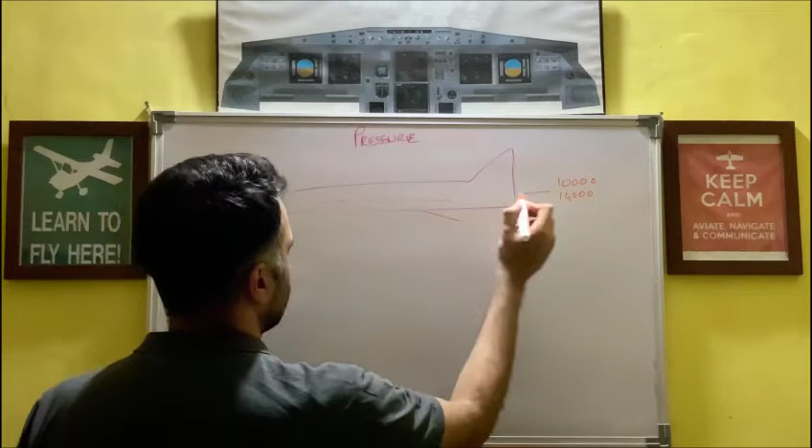So to ensure that at 38,000, 39,000 feet we are able to survive, the air inside the aircraft is pressurized to an altitude of maximum approximately 8,000 feet.

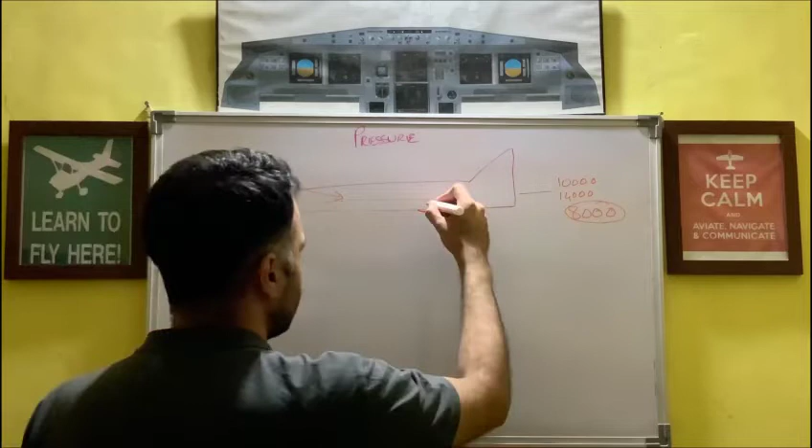How is that done? The pressure inside the aircraft is maintained using an outflow valve. Air comes in from the air conditioning system. The pressurization system doesn't bother about that air, it just controls how much of this air can go out. By closing the outflow valve, you allow less air to go out and you pressurize the aircraft. By opening the outflow valve, you allow more air to go out and you depressurize the aircraft.

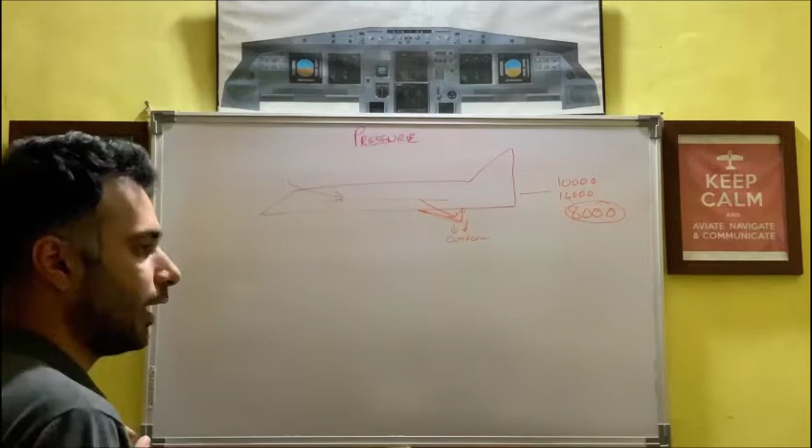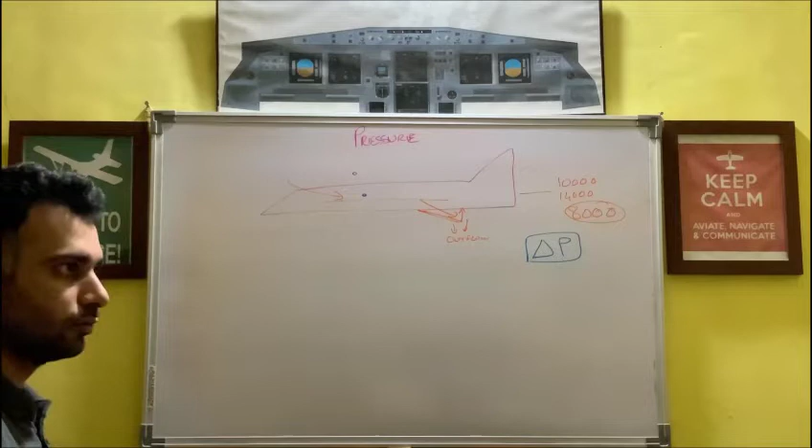How is it decided how much this pressure should be? It's based on a value known as delta P. Delta P is the difference between the pressure inside versus the pressure outside. Since the aircraft, being a structural body, can only handle so much pressure difference, delta P plays an important role.

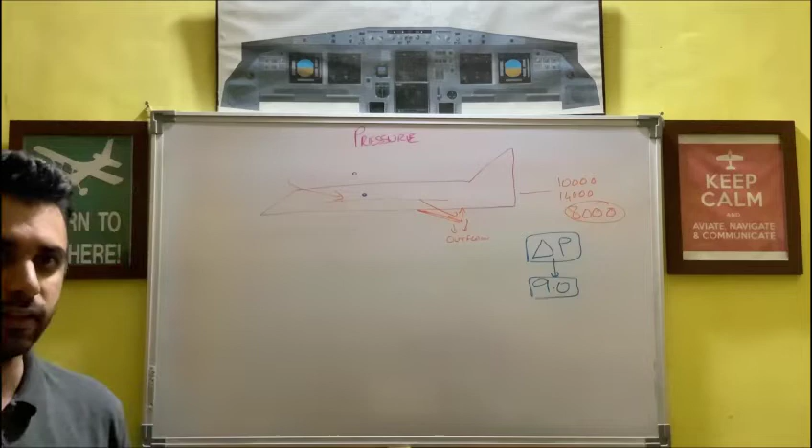Airbus has said that the difference in pressure between inside and outside should not exceed 9 psi. If it goes beyond 9 psi, the structural integrity of the aircraft might be compromised. The aircraft might not be able to handle more than this much pressure difference between inside and outside.

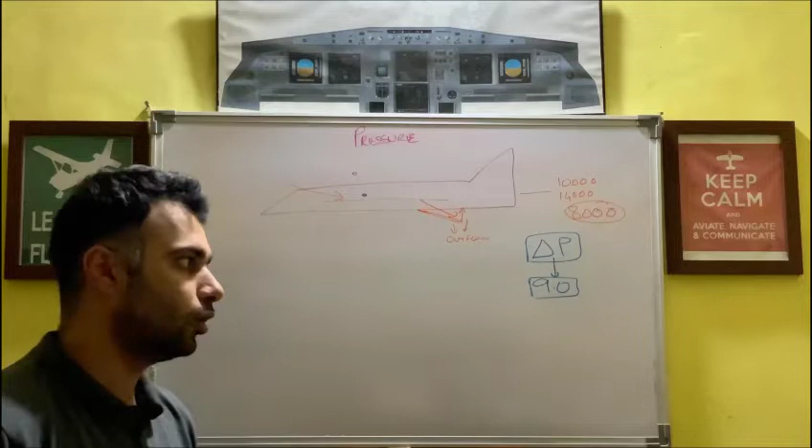So delta P at any given point of time plays an important role in the rate at which the aircraft is pressurized and depressurized. The other important factor is the comfort of the passengers and crew sitting inside. The rate at which this pressure is changed is controlled so that it's a comfortable transition, calculated in terms of cabin altitude rate of climb or cabin altitude rate of descent.

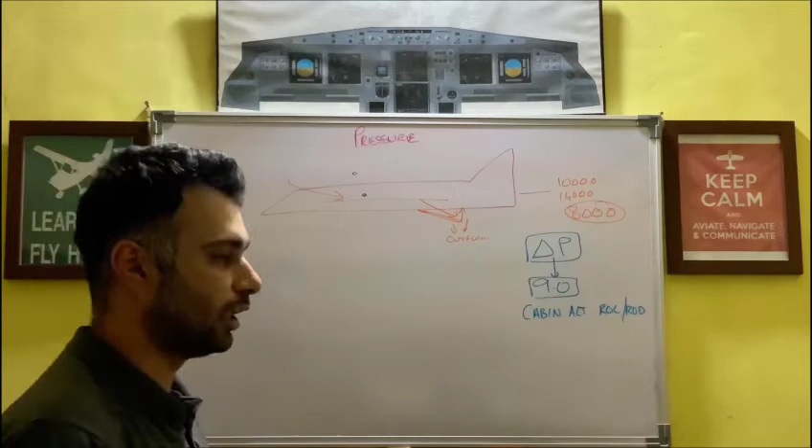Rather than talking about pressure change in terms of PSI, Airbus said let's talk about it as cabin altitude rate of climb and cabin altitude rate of descent. This is so it's more easily and instinctively relatable for pilots, so they understand: if my aircraft is climbing at 3,000 feet per minute and my cabin altitude is climbing at 500 feet per minute, what it means is more instinctively deciphered by pilots and they comprehend it faster.

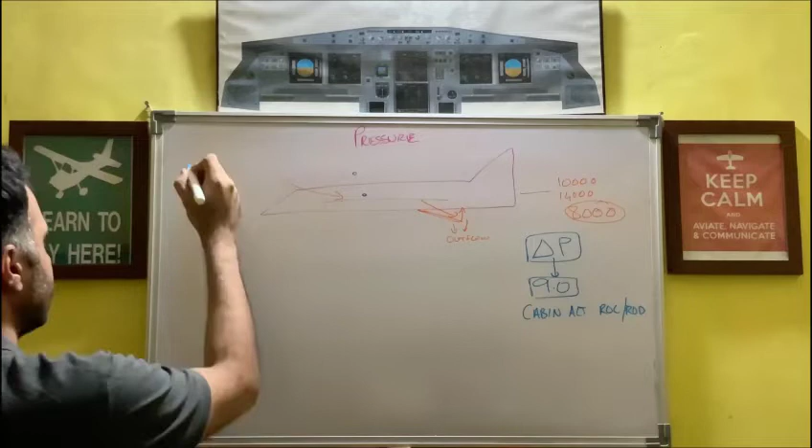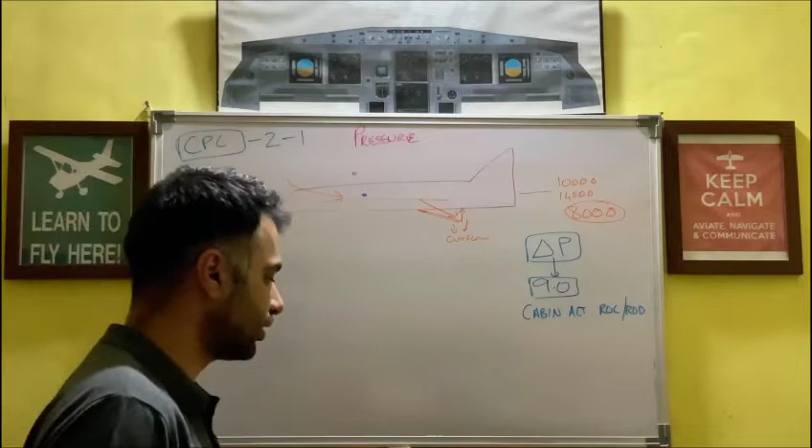All right, so this is how the calculation is done. Now who is doing the calculation is the CPC, cabin pressure controller. There are two cabin pressure controllers at any given point of time. One of them is controlling the system, the other is on standby in case of failure, and they keep alternating each flight.

How do they control this aircraft? It uses the outflow valve and it has a pre-programmed schedule that it uses. So let's understand that schedule. Basically, in different phases of flight, the outflow valve is controlled differently. So what are the different phases of flight?

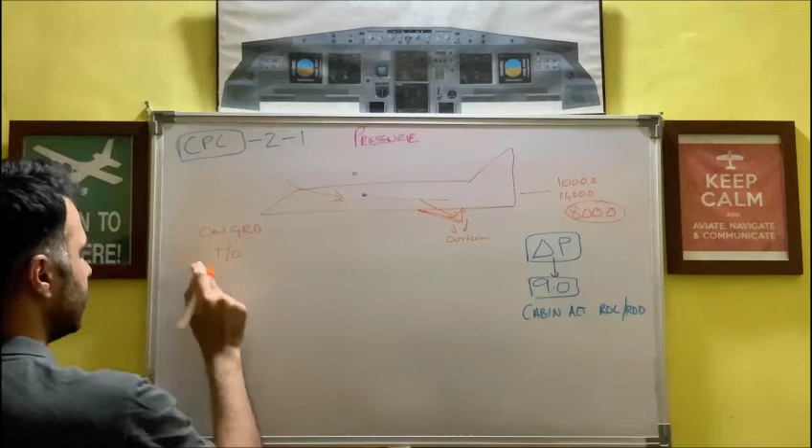There is on ground, then there is at takeoff, before rotation. Then there is climb phase, cruise phase, descent phase, before landing, at landing, and again on ground after landing. There is also an abort phase, which we will discuss after that.

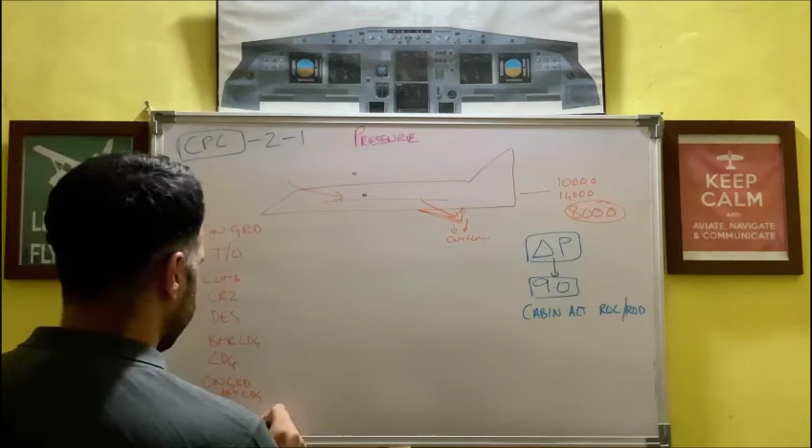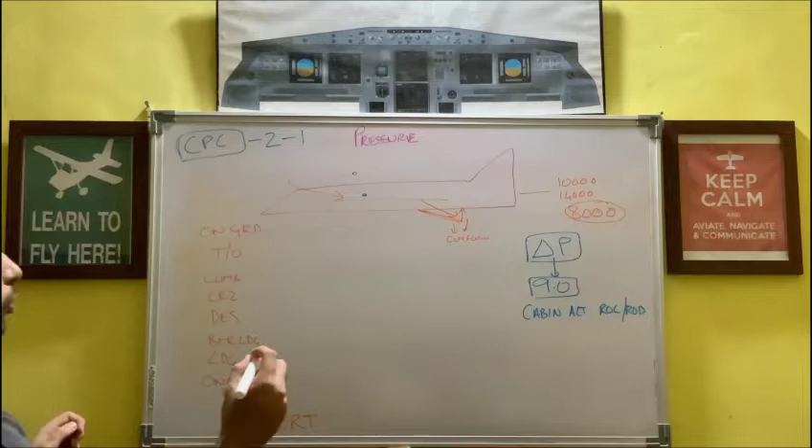So let's discuss one phase at a time. First we'll go through on ground. What happens on ground? Everything is fine, passengers are okay with the pressure, so there's no need for the outflow valve to do anything. So the system says: stay fully open, boss, you have no work to do right now. Then there is at takeoff.

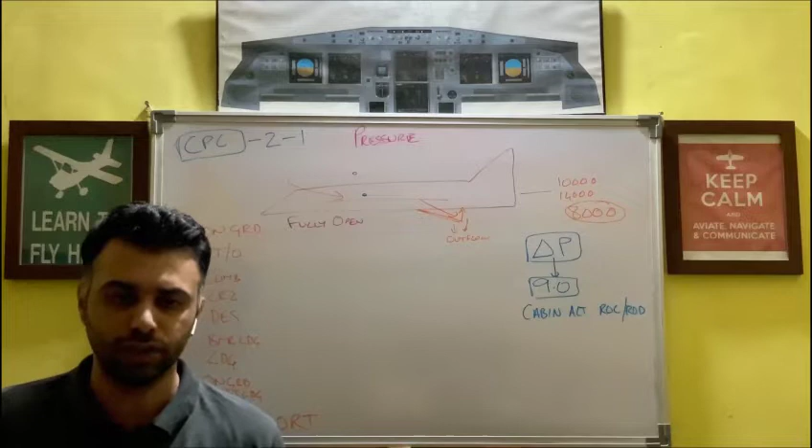When you put takeoff thrust, you are about to start your in-flight phase. So what the system realizes is, if you immediately start pressurizing the aircraft after you take off, it can be discomforting for passengers and crew, because suddenly transitioning from unpressurized to pressurized flight can cause physiological discomfort.

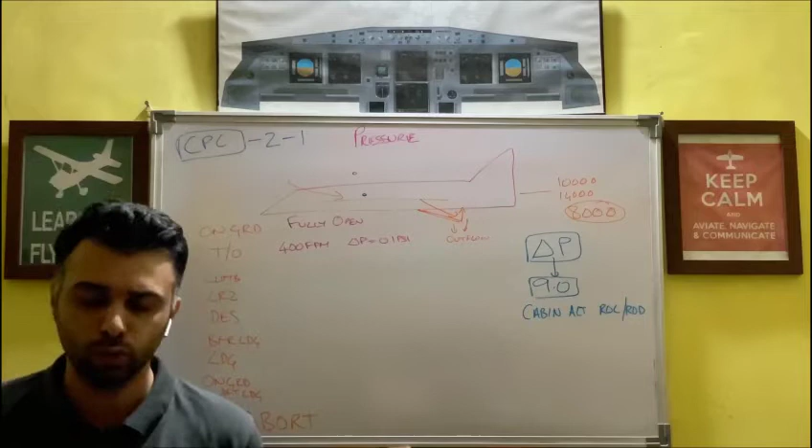So before you actually get airborne, the aircraft starts to pressurize at a rate of 400 feet per minute till the delta P is equal to 0.1 psi. So a little pressurization is done so that the body starts getting used to going from unpressurized to pressurized flight. This is known as pre-pressurization, meaning before the actual need for pressurization, you have already started pressurizing the aircraft. This is for a comfortable transition from unpressurized to pressurized flight.

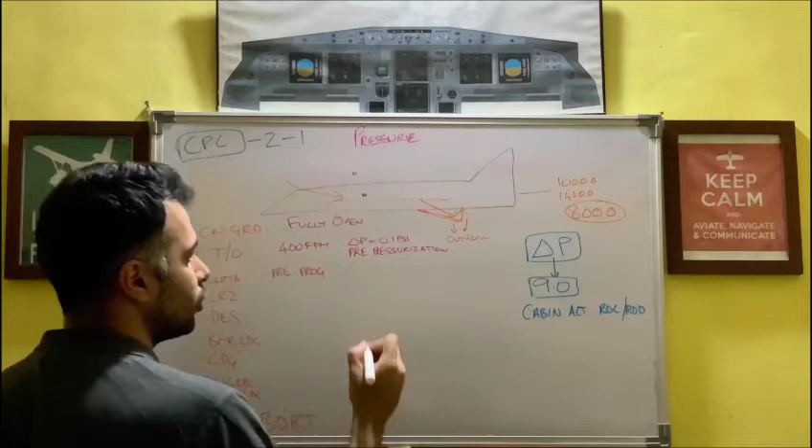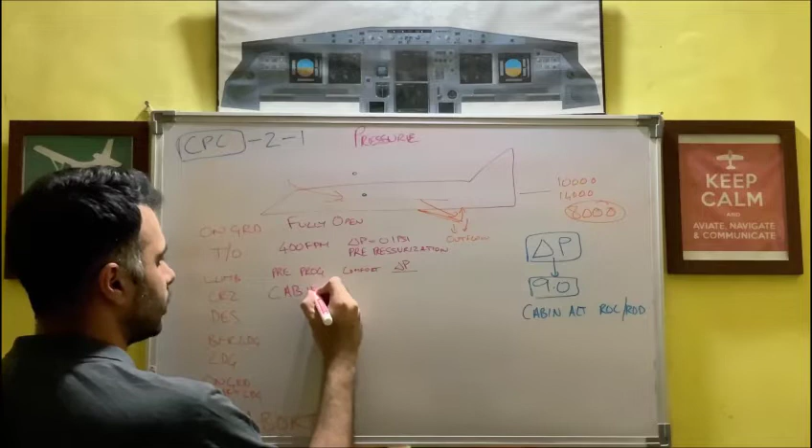Then comes the climb phase. In climb phase, a pre-programmed rate of change of pressure is maintained to ensure, firstly, comfort of passengers, and second, to ensure that this delta P does not exceed prescribed values. Then comes cruise phase. During cruise, a certain cabin altitude level is maintained, with a maximum of 8,000 feet cabin altitude as prescribed by Airbus. So this is pretty simple: pre-programmed rate is there, pre-programmed cabin altitude is maintained.

Again, in descent, a pre-programmed rate of descent is used for comfort, and delta P is maintained according to requirements. Finally, before landing, just like before takeoff, the delta P is brought down to 0.1 psi again, so that the transition from pressurized to unpressurized is not sudden.

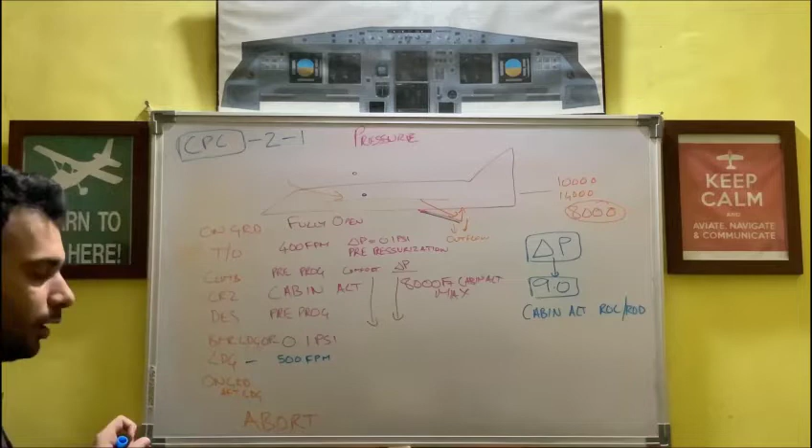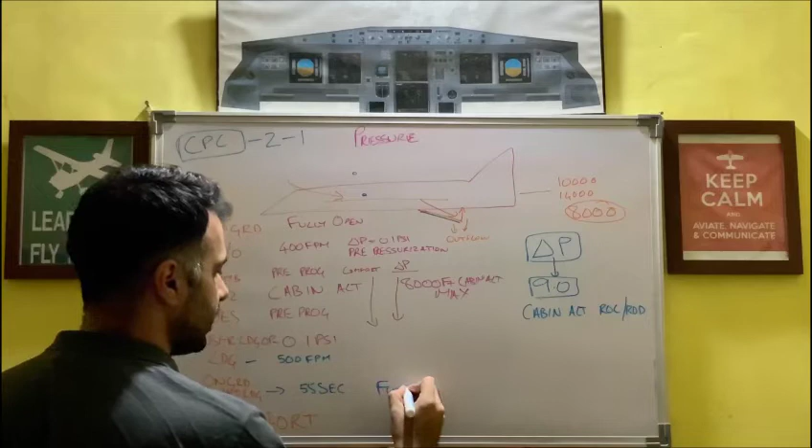Now once you have landed, the aircraft outflow valve is opened to release pressure at a rate of 500 feet per minute till it is completely unpressurized. Finally, on ground after landing, 55 seconds after landing, the outflow valve is again fully open.

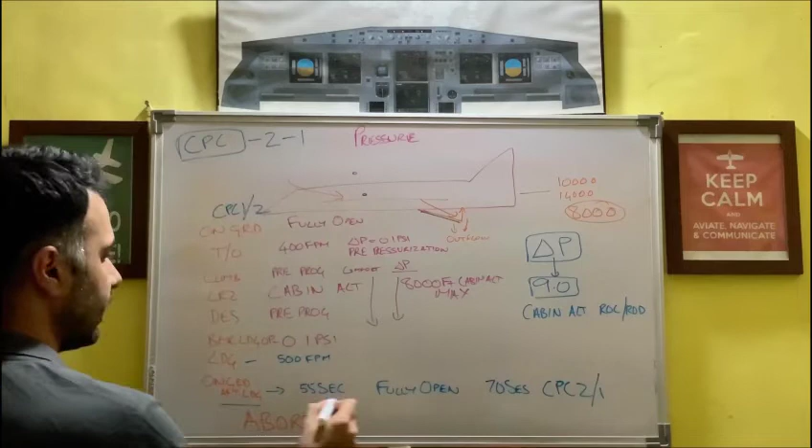Approximately 70 seconds after landing, if CPC-1 was controlling the system for this entire flight, it changes over to CPC-2. Vice versa, if CPC-2 was controlling the system, it changes over to CPC-1. So each one exchanges their workload after each flight, 70 seconds after landing. That is how the system works. At any given point of time, if CPC-1 fails in flight, CPC-2 automatically can take over and do the job.

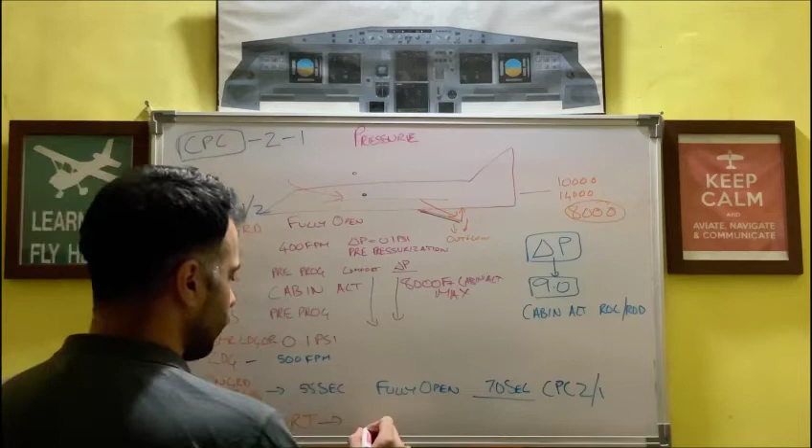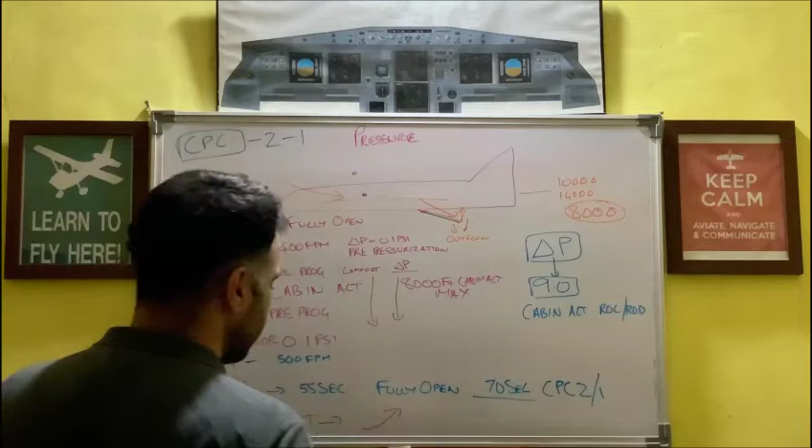Now I discussed that there's something known as abort mode also. What abort mode does is, after takeoff, if a climb is not detected by the system, if the system detects that takeoff thrust has been applied but no climb is taking place, it will recognize that you have aborted this takeoff, and delta P will be brought back to 0.1 psi without pressurizing the aircraft any further.

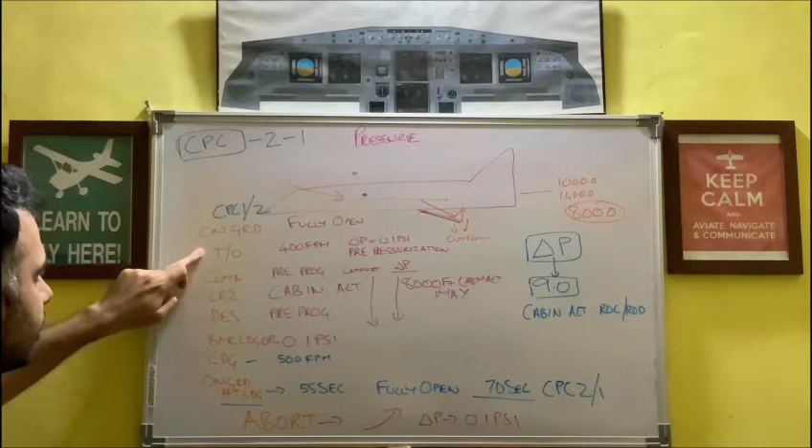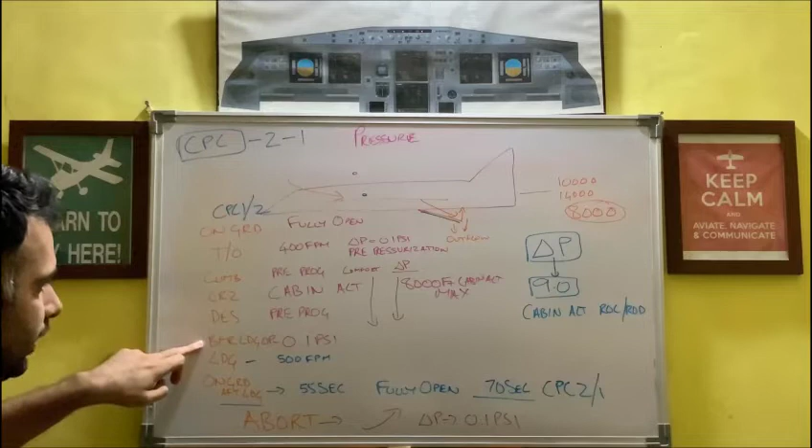So this is how the aircraft configures the pressurization schedule: fully open on ground, 0.1 psi at takeoff just before rotation for comfort of passengers transitioning from unpressurized to pressurized. Then pre-programmed rate of climb, pre-programmed cruise altitude, pre-programmed rate of descent, and before landing it again comes back to 0.1 psi. After landing, pressure is released at a rate of 500 feet per minute. On ground 55 seconds later, it's again fully open, and 70 seconds after landing, it switches over, with one computer taking over from the other.

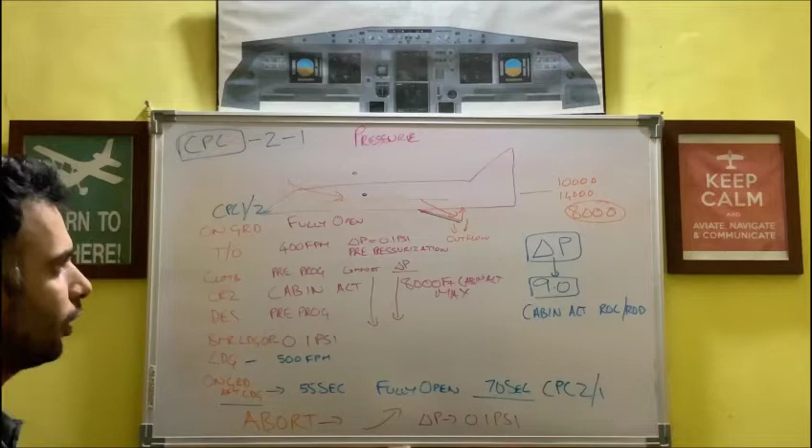In abort mode, in case it does not recognize a climb after takeoff thrust is applied, delta P is brought back to 0.1 psi. Maximum pressure that the aircraft can handle is 9 psi.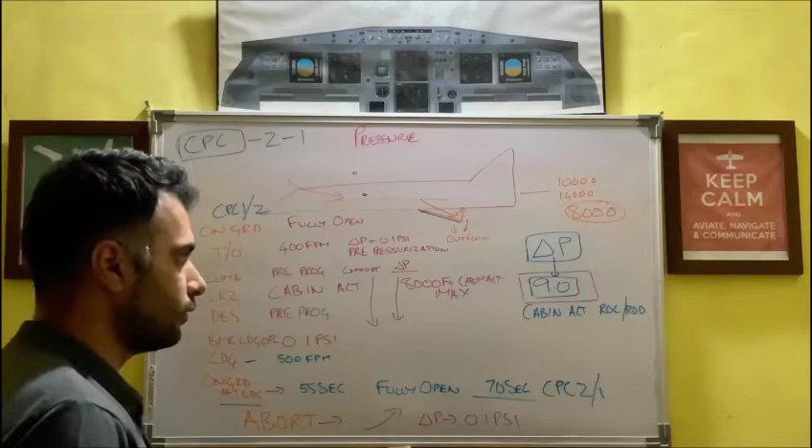So how does the aircraft handle it, in case there is any failure in the system and the pressure is not being maintained within delta P of 9 psi? What is done is there are safety valves installed. Airbus always has a backup plan. In case the system cannot handle this situation and delta P exceeds 9 psi, two safety valves have been installed, not one. These will hold the pressure and sense if there is an increase in positive pressure of more than 8.6 psi, and will relieve the pressure. It also has a negative pressure control of minus 1 psi.

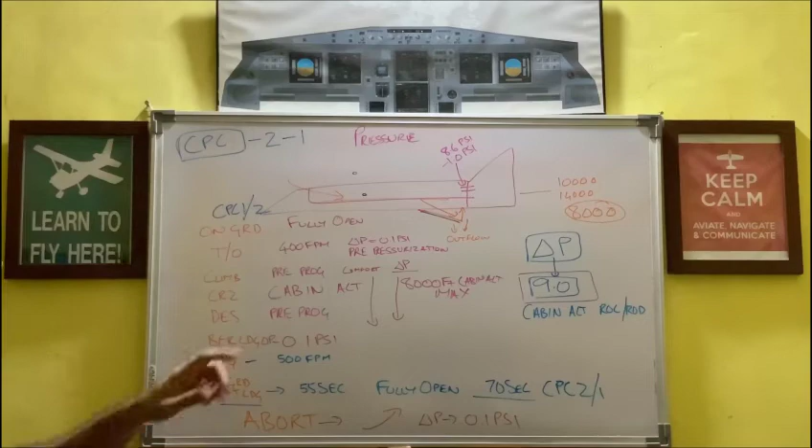So if the pressure outside is more than the pressure inside, the safety valve will handle that situation. A positive pressure of 8.6 psi will trigger the safety valve to operate, and if the negative pressure is more than 1 psi, again the safety valve will operate. So that is as far as the safety valve is concerned.

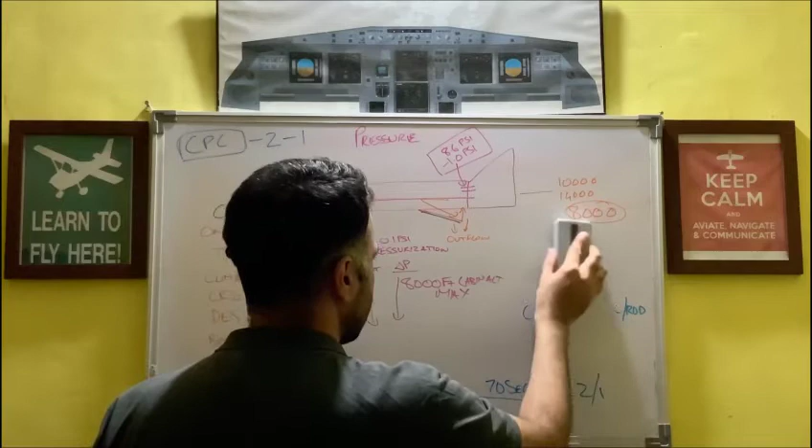Let's discuss what else we have in case of any abnormal situation. The CPCs work on a very simple principle. They use all this logic and calculate what they need to do. To do that, they have three modes of operation: auto mode, semi-automatic mode, and manual mode. To understand how they work, let's understand what information goes into these computers.

It's pretty simple to understand by looking at the schedule itself. You need to know whether you are on ground or in air. To understand that, you use the LGCIU. So the LGCIU tells the CPC whether you are on ground or in air.

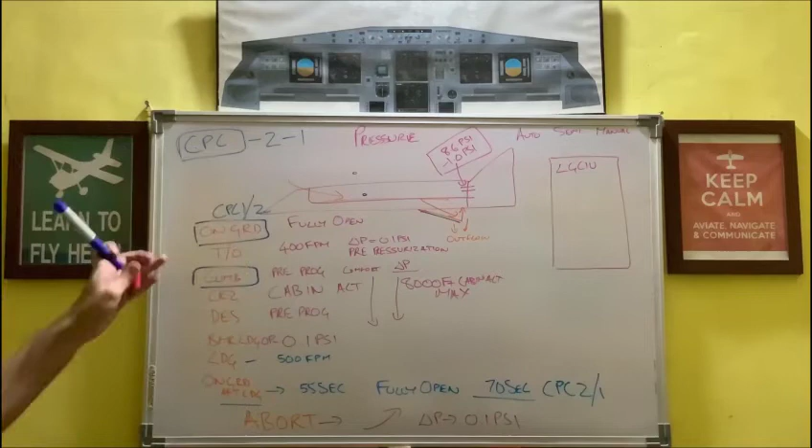Then you want to know whether you are landing or taking off, what your phase of flight is. For that, you use the thrust lever angle position, which comes from the EIU.

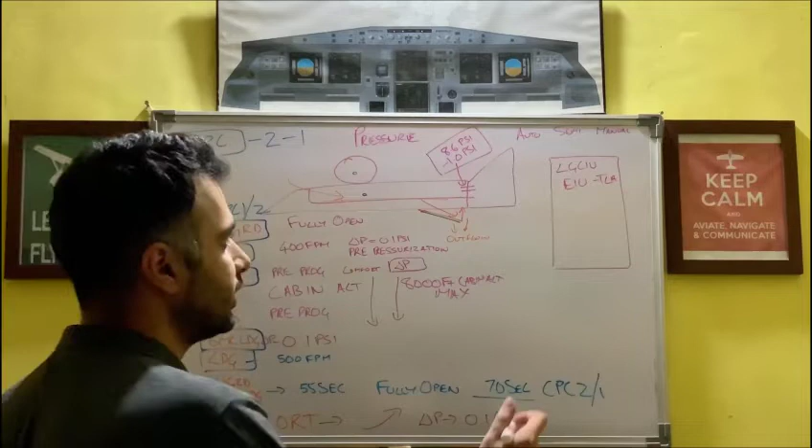Then you want to know your delta P. To know your delta P, you need to know the outside pressure, which requires static pressure. Who calculates static pressure? The ADIRS. They calculate the static pressure and also tell you how much correction is required - compressibility error, density error, all those errors are there. So barometric errors are compensated for, and the ADIRS calculates the static pressure and the barometric errors to tell you what the outside pressure is.

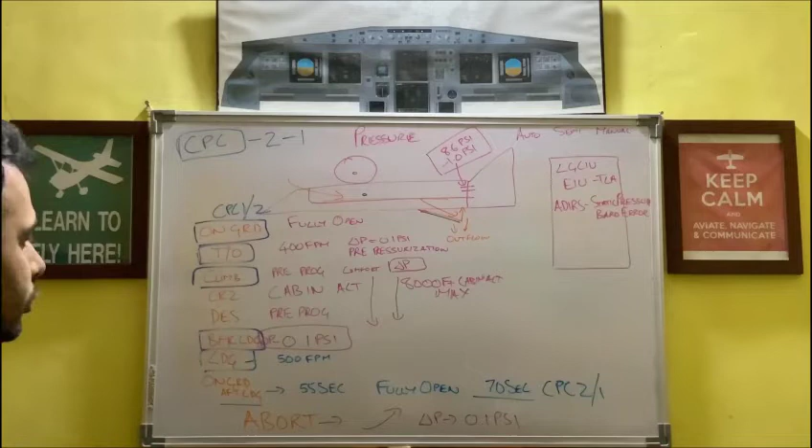Then what else is required is the landing elevation, because you need to know what the landing elevation is to pre-program the rate of descent, and you need the pressure. The QNH needs to be calculated so you know what the delta P of 0.1 psi should be.

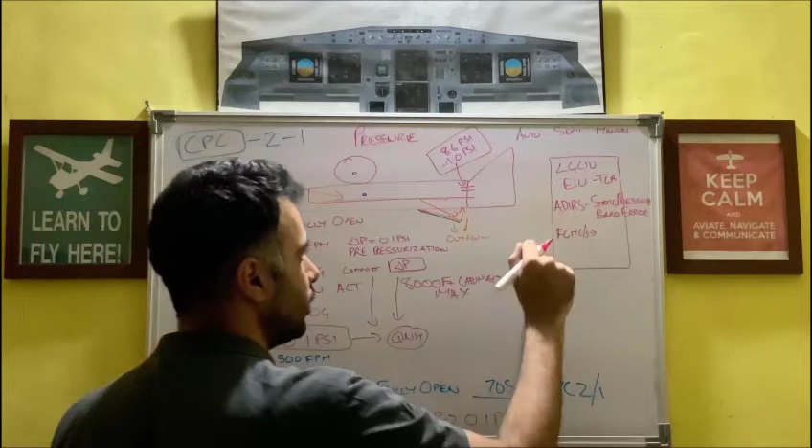For that, the FMGC and FMGS are used. You enter the QNH into the MCDU, and it will be used by the FMGC, which gives you the QNH, while the landing elevation is calculated from the database. So all this information goes to the CPCs, CPC1 and CPC2, and they each run an AC motor that runs the outflow valve.

All right, so that covers automatic mode. In semi-automatic mode, what happens? Suppose there is a corruption in the FMGC information.

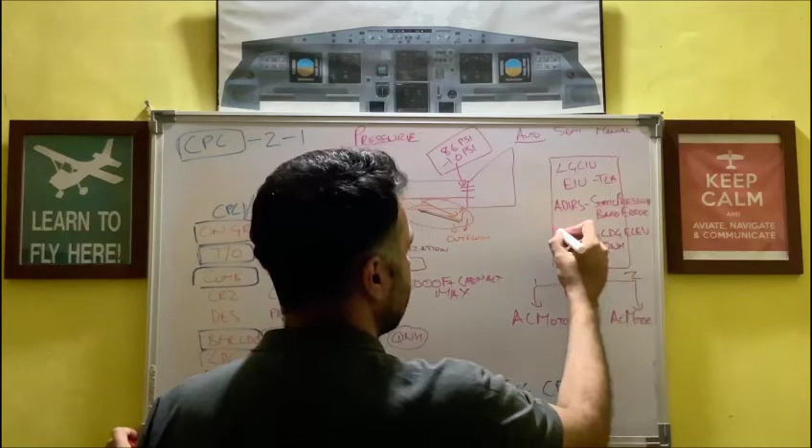The database is lost for some reason or it's incorrect. So what is done then? You can manually enter the landing elevation through the overhead panel. You can monitor what you are entering on the ECAM and turn the knob to enter the landing elevation. Based on what you have manually entered, the CPC will still do the same work, but this is known as semi-automatic mode - instead of automatically getting the landing elevation, you are telling it what the landing elevation will be, and it will do the automatic functioning based on your manually entered value.

Lastly, if CPC1 and CPC2 fail, or if these AC motors are not running, there is also manual mode. You can manually control the outflow valve through a DC motor. Now there is a little condition to this - the DC motor is not as powerful as the AC motors, so its response time is a little sluggish.

It takes a little bit of time for you to see what you have fed into the system. So once you use the DC motor to open or close the outflow valve - moving up opens the outflow valve, and moving down closes it - it will take about 5 to 10 seconds to see a response from the outflow valve on the ECAM.

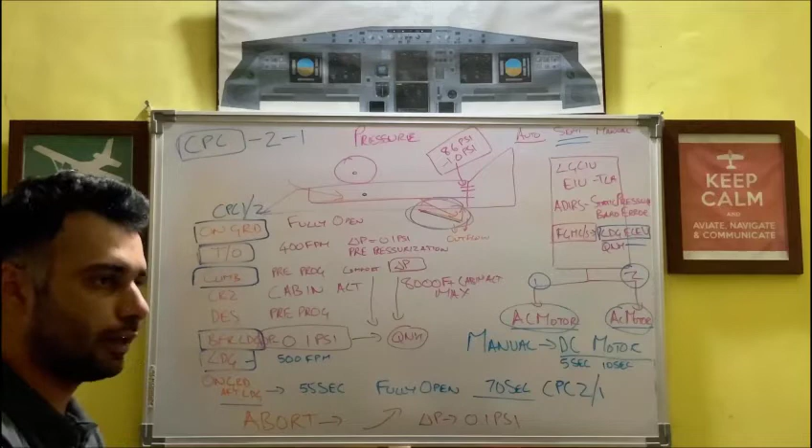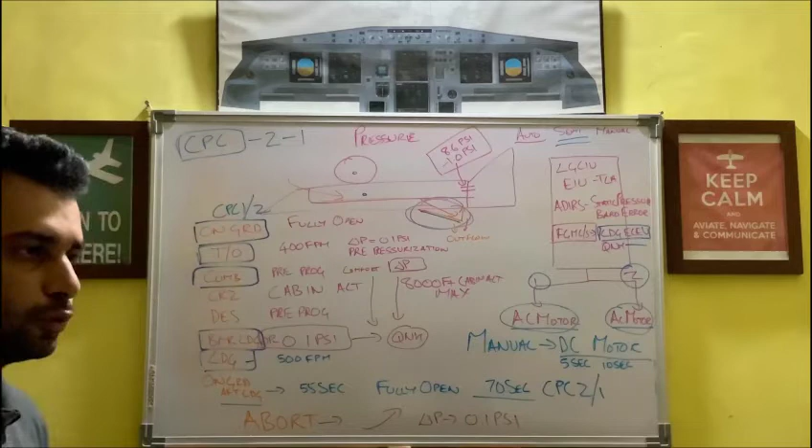Okay, so when you are using manual control, please be sensitive to the fact that when you are making an input, wait a few seconds for it to respond. Otherwise, your situational awareness of what the position of the outflow valve is and what you need to do to correct it will be compromised. So give it a little bit of time and take it easy while you are using the outflow valve manually.

Furthermore, when you're using the manual mode, your delta P and other pressure information that is being given to you, and the position of the outflow valve on the ECAM, is not as accurate as when you're using the automatic modes. The range of accuracy is a little poorer than when you're using the automatic mode. So you have to keep that in mind also while you're using the manual mode.

Keeping that in mind, this information is compromised and the manual mode is a little sluggish. The safety valve has a range of 8.2 psi to 8.9 psi, not only 8.6 psi. So sometimes you might see the safety valve operating at 8.2 or 8.9 psi because of this inaccuracy and sluggishness in the manual mode's operation.

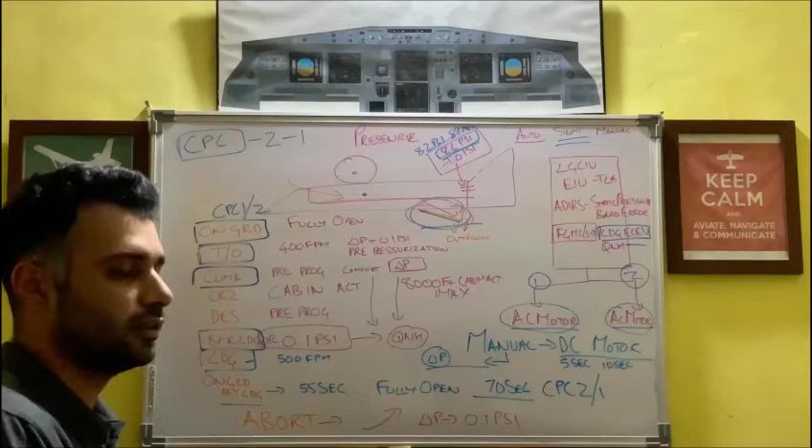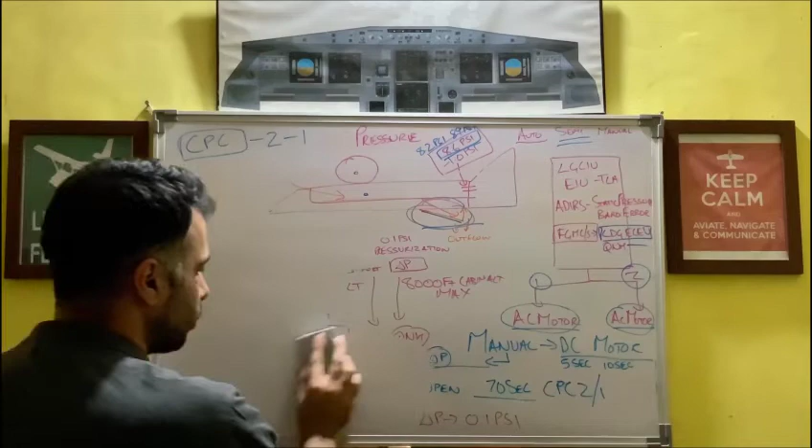So that is as far as the different modes of operation are concerned, and as far as the safety valves are concerned. Let's discuss a couple more things. There are, I think, three more things to cover, regarding the abnormal operation procedures. We have covered everything regarding the normal operation procedures.

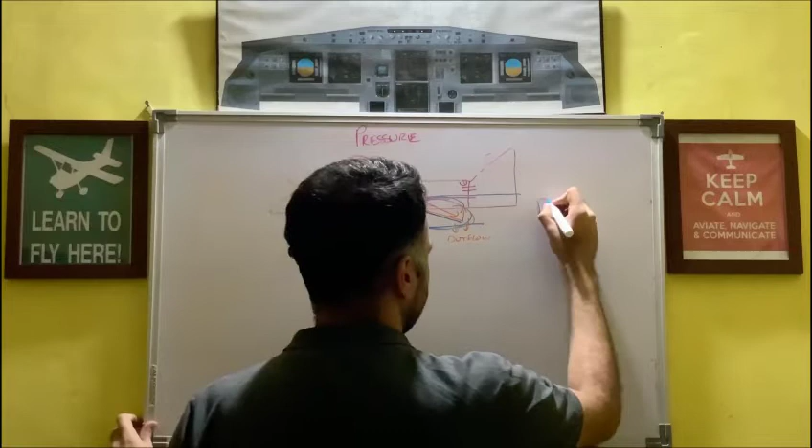So suppose now you are landing in water, ditching. At any time when you are ditching, all the systems which have valves have to be discussed. If any valve is below the flotation line, that is going to compromise your aircraft in the ditching scenario. In case of your pressurization system, the safety valves are above the flotation line. They are not below the flotation line, so they do not have any issue during ditching. But the outflow valve is below the flotation line.

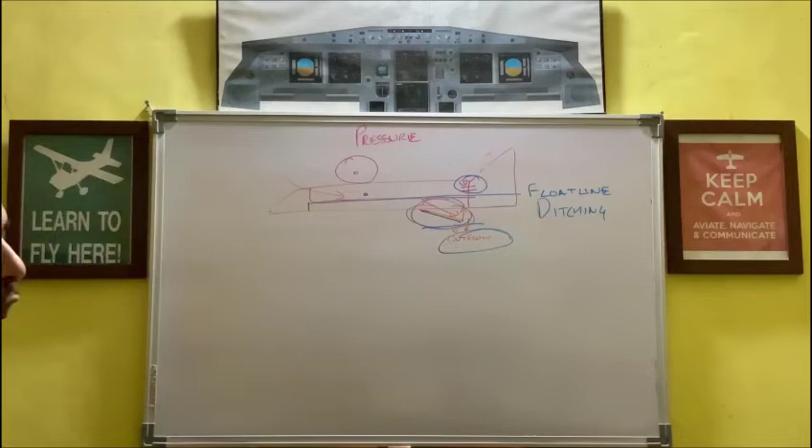So when you push the ditching push button, the outflow valve will close. That is in automatic mode only. In manual mode, you have to physically close it. It does not close on its own. So that is as far as ditching is concerned.

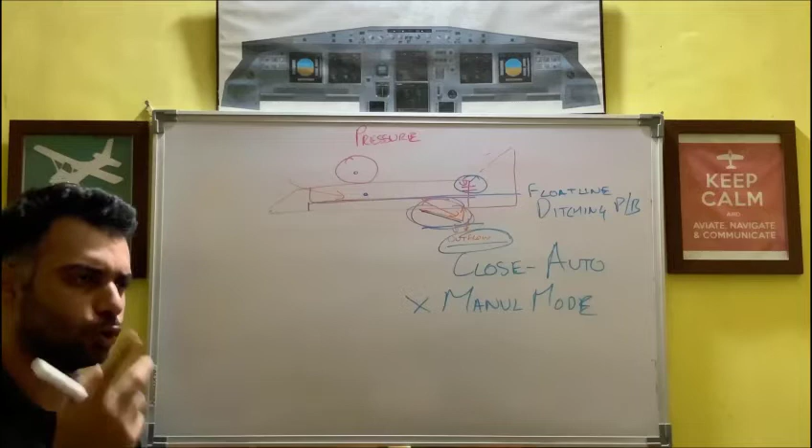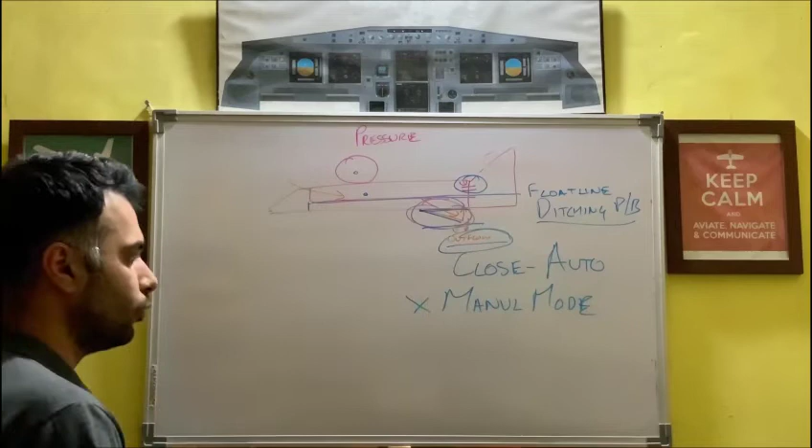Now, if you push the ditching push button while you are on ground, suppose some maintenance work has taken place and the ditching push button had been pushed, and you come to flight, or for any reason somebody just pushed the ditching push button and you are not aware of it, you come for flight and you see the ditching push button pushed, be aware that when you push the ditching push button, the outflow valve will close. Now, if you come in and you tell the engineer, yeah, start the low pressure air conditioning system, and the low pressure unit is started, and air from the air conditioning system is introduced into the aircraft on ground, what will happen?

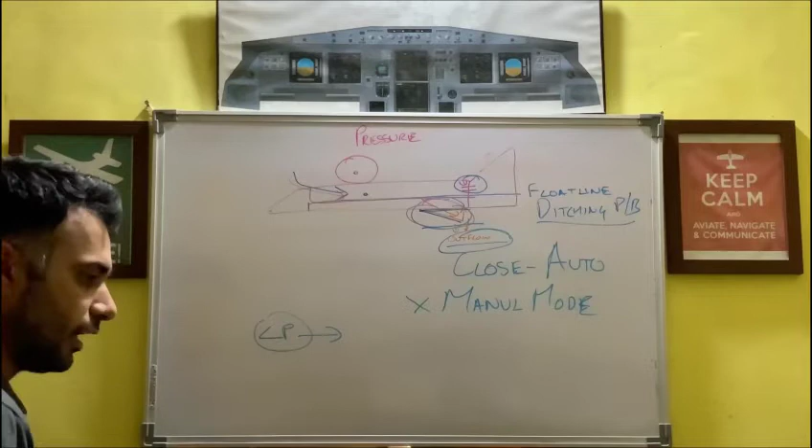The delta P will start to increase and the pressure inside the aircraft will start to increase. You should keep this in mind in case you see the ditching push button is pushed on ground and you are using the low pressure air conditioning pump. So that is as far as ditching is concerned.

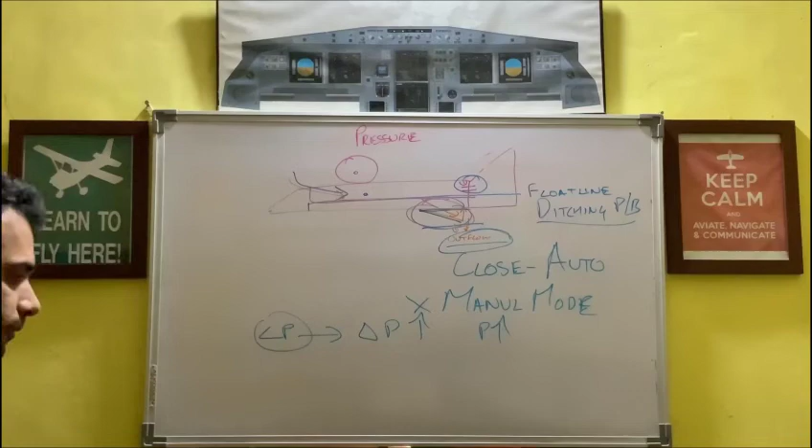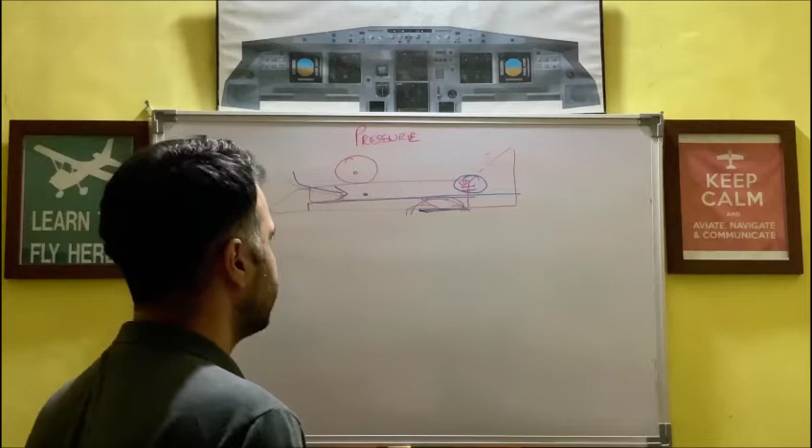Now let's discuss: if in air your air conditioning system fails on you, or if in air there is a smoke scenario, then you might have to call the ram air inlet into the picture. Ram air inlet allows air from outside to enter the aircraft in case the air conditioning system has failed. You have no other option.

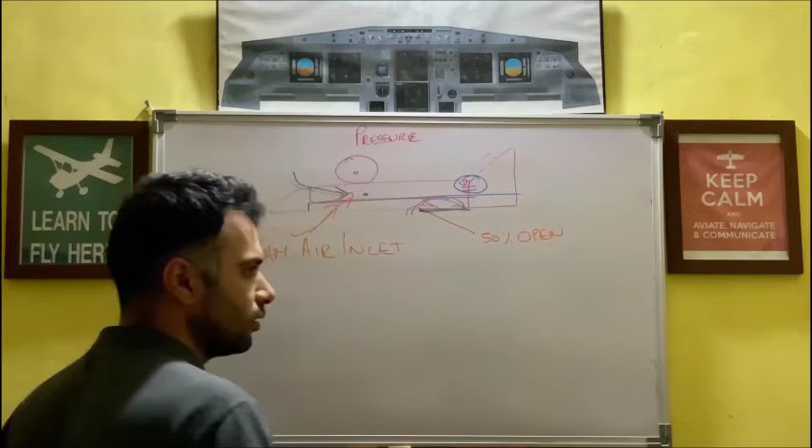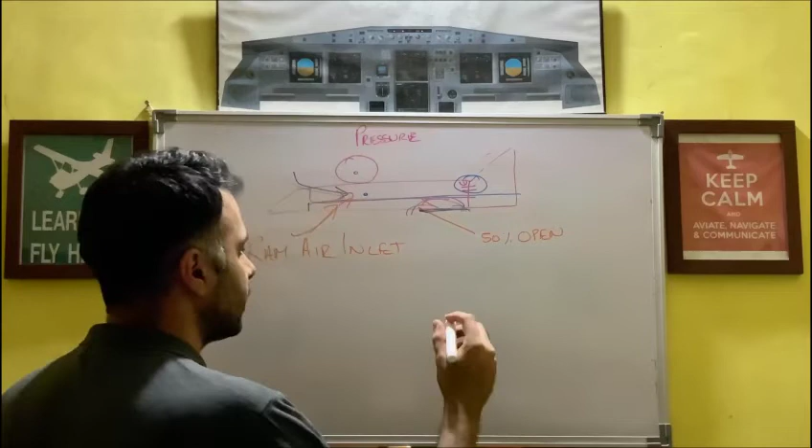So in this case, what Airbus has done is tell the outflow valve to pre-program itself to sit at 50% open position. You can call it 50% closed depending on your point of view, it's the same thing. So when the ram air inlet opens, the 50% open or 50% closed position is automatically selected by the outflow valve.

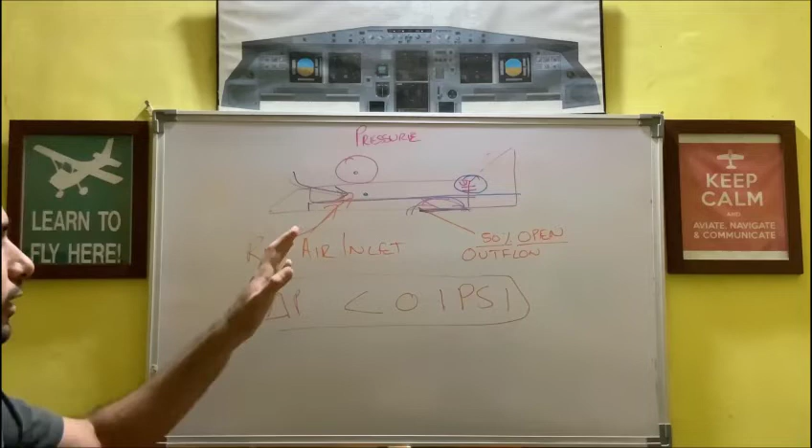Okay, this has a precondition. This 50% open or close will only happen if delta P is less than 0.1 psi. Why is this so? If delta P is more than 0.1 psi, that means the aircraft has still got a higher pressure than outside.

Now if you open this outflow valve 50% when there is pressure inside the aircraft, it is like bursting a balloon. Think of it logically. If you have pressure inside a balloon and you suddenly make a hole in it, the balloon bursts. There is no normal transition where the air just nicely blows out. The balloon bursts and it causes structural damage. This is the same situation with the aircraft.

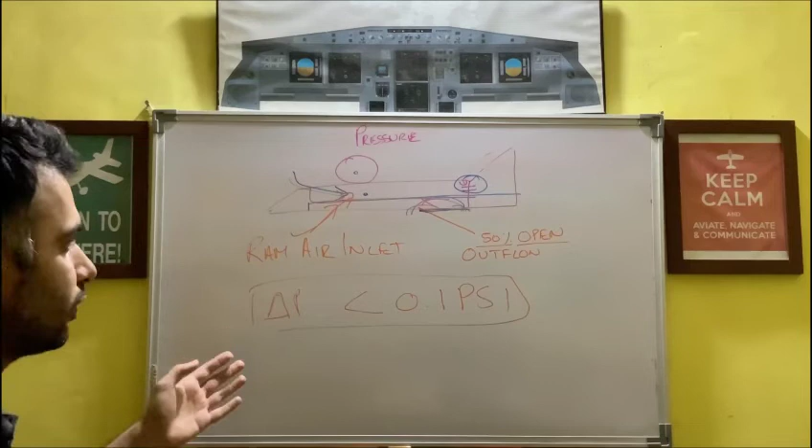If the delta P is greater than 0.1 psi, that means there is pressure inside my aircraft, so-called balloon. Now if I make a hole in the balloon, what will happen? The outflow valve will open 50% and suddenly there will be a sudden gush of air blowing out from the outflow valve opening. This might cause damage to my aircraft.

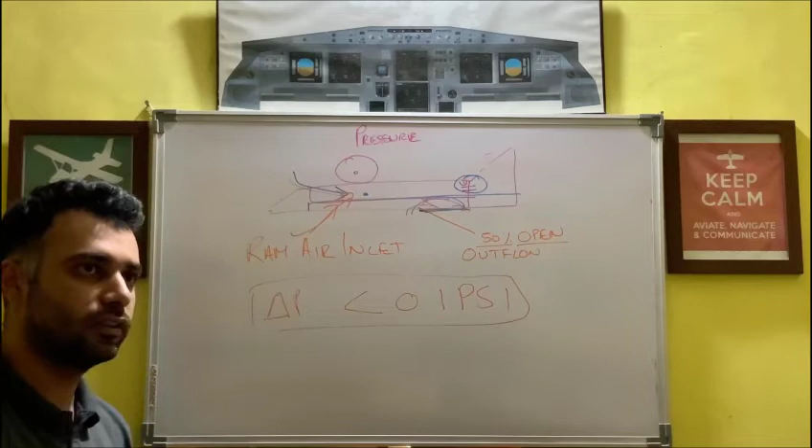So that is why in that situation, the outflow valve will not open 50%. Even if you are in auto mode, it will say, boss, in auto mode this doesn't make sense to me, you are going to be damaging the aircraft, please think of what you're doing.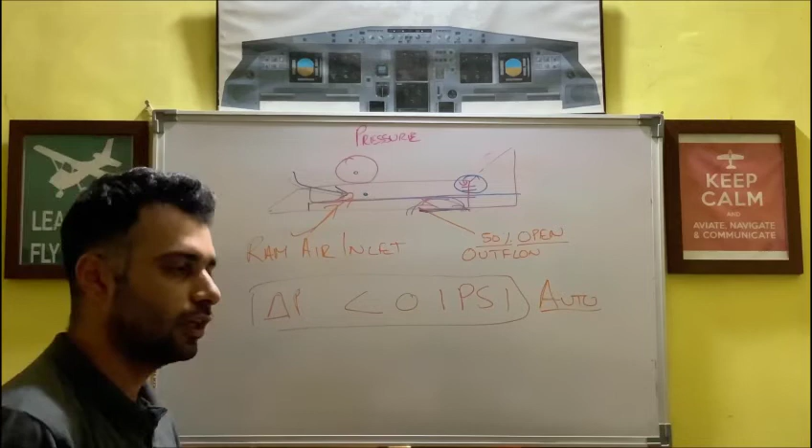I am not opening it 50%. This is only in auto mode. In manual mode, you have to physically do whatever you want to do, it will not do it itself. Even if you open the ram air inlet, you have to manually control the outflow valve. You decide what you want to do and how you want to do it.

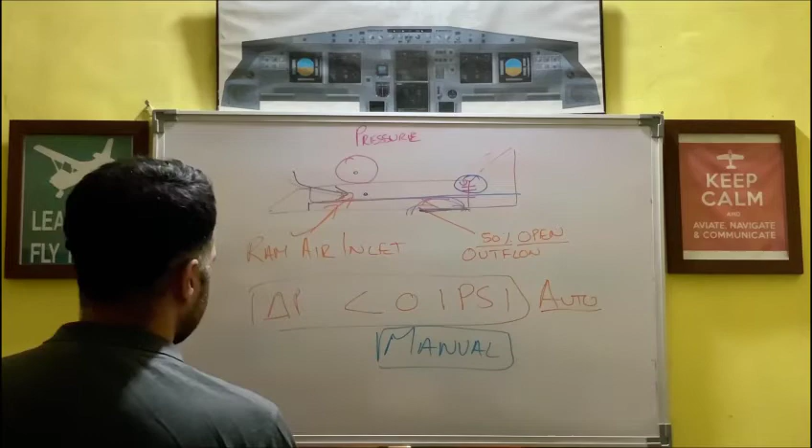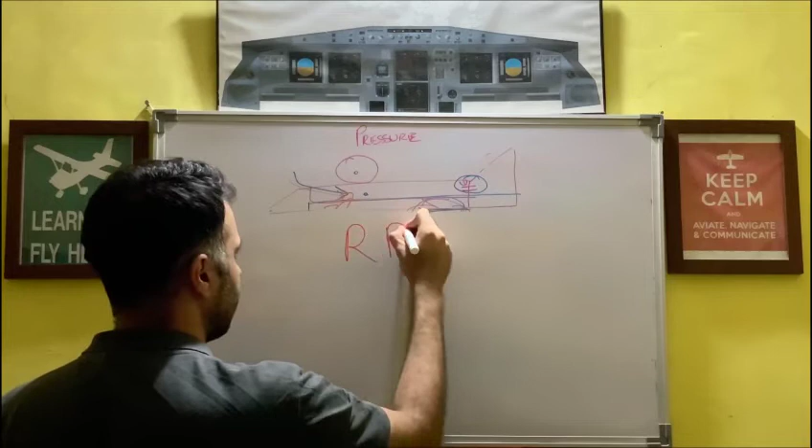So that is how the outflow valve works in case we are using the ram air inlet. All right, so that is as far as the ram air inlet is concerned. The last topic left to cover is a computer known as the residual pressure control unit.

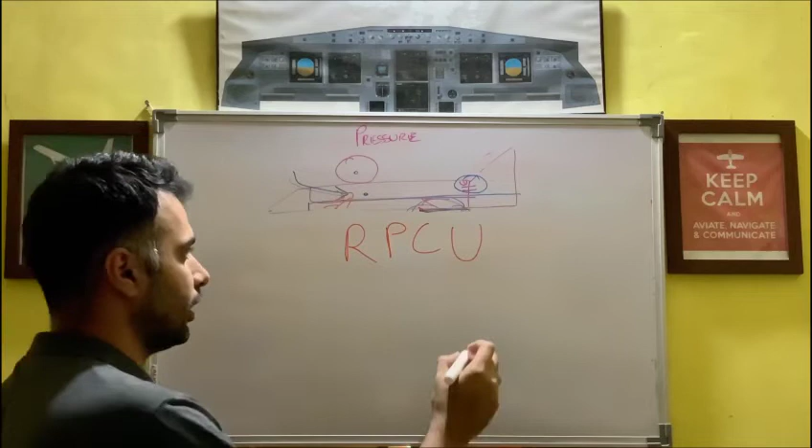This control unit has no work actually. It is on ground in case there is little pressure left. Suppose there is still delta P being registered, a little meaning 0.03 or something. The residual pressure control unit recognizes that situation and allows the pressure to dissipate.

It has a few preconditions for working. First condition is you have to be on ground, it will only work on ground. This computer does not work in air.

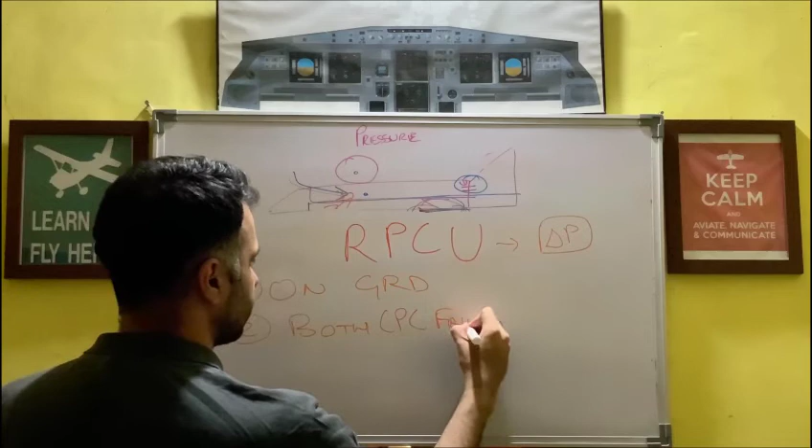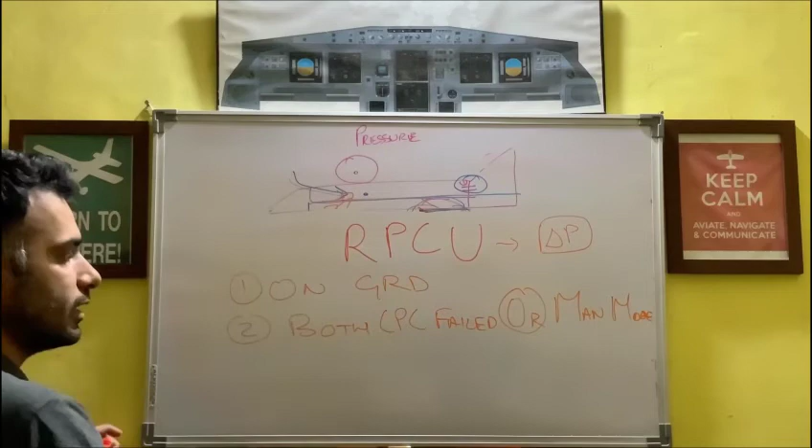Second condition is both CPCs should be failed, or you are in manual mode. If the CPCs are working, it is disregarded. If you are only in manual mode, or both CPCs are failed, then this computer comes into the picture.

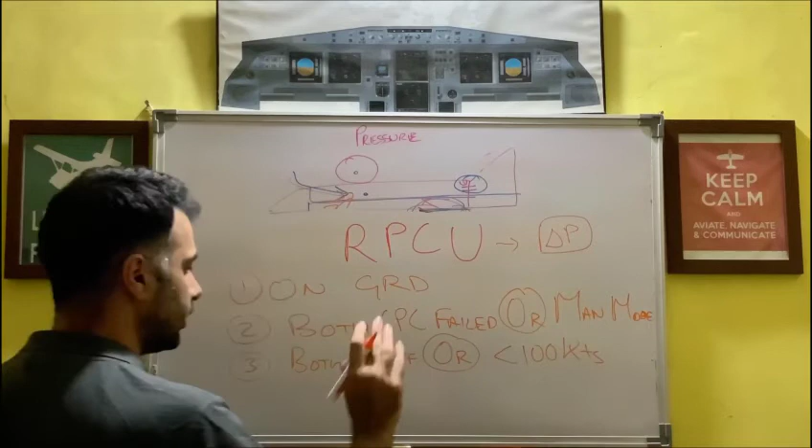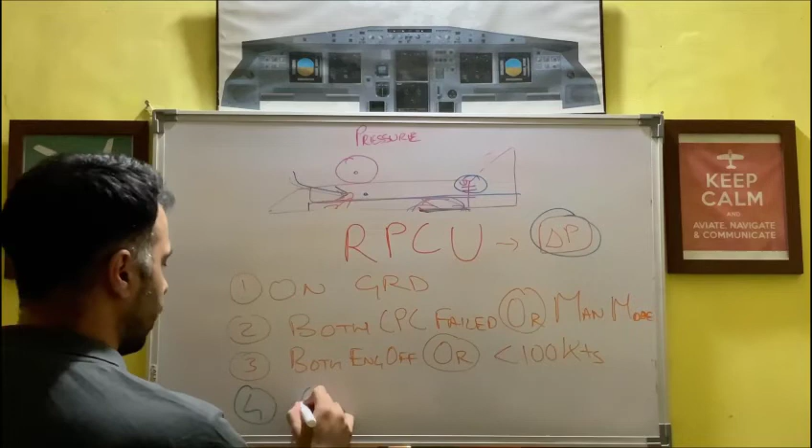Third condition is both engines off, or less than 100 knot speed. So you have landed, and there is still a little delta P pressure. Last, fourth condition is the outflow valve is not fully open.

Then only this RPCU will tell the outflow valve: the CPCs are not working, or you are in manual mode, engines are off or you're below 100 knots and you're on ground. Why haven't you opened the outflow valve? There is pressure inside the aircraft.

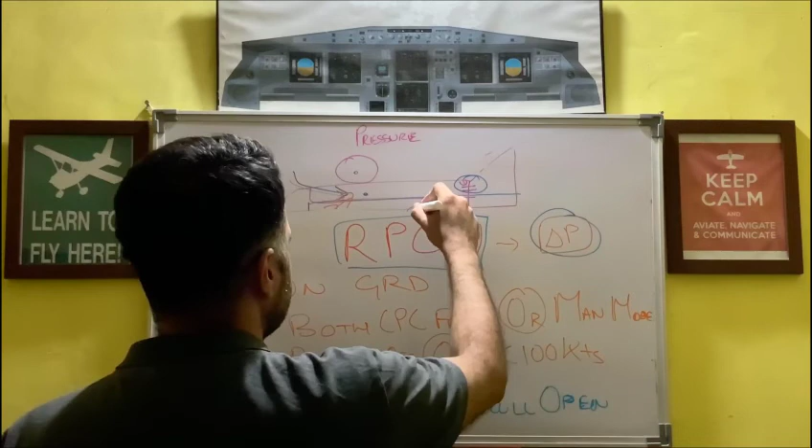Release this pressure. Then the RPCU will say, okay boss, now I am taking control, you don't seem to understand what to do in manual mode. I am taking over, outflow valve please open fully, release this pressure, and let us end this flight safely. So that is the job of the RPCU.

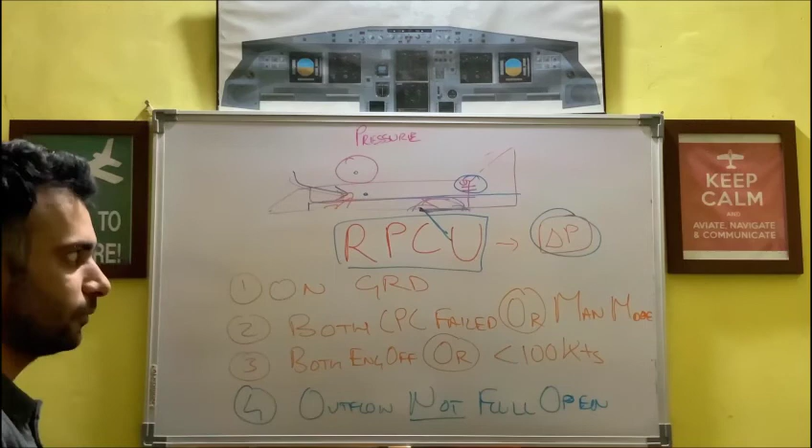It is not a very complicated computer. Only if the other two computers are failed, or for some other reason you have selected manual mode, when you are on ground with both engines off or below 100 knots, if the outflow valve is not fully open and there is some residual pressure in the system, RPCU will say, hey boss, please release this pressure, this guy doesn't know what he's doing. Outflow valve will open fully.

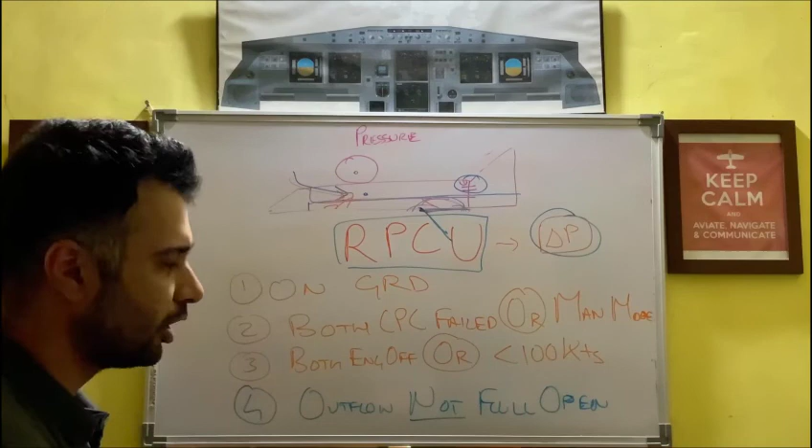Okay, so here we go, that is as far as the pressurization system is concerned. I've pretty much covered everything that I could think of. In case I have made any mistakes on my part, or if there is any incomplete or incorrect information, please share it with me. I've created this platform for us to share our ideas, knowledge and understanding of this beautiful aircraft that we fly. Hopefully today I was able to successfully accomplish that for the pressurization system of the Airbus 320. Thanks, take care.